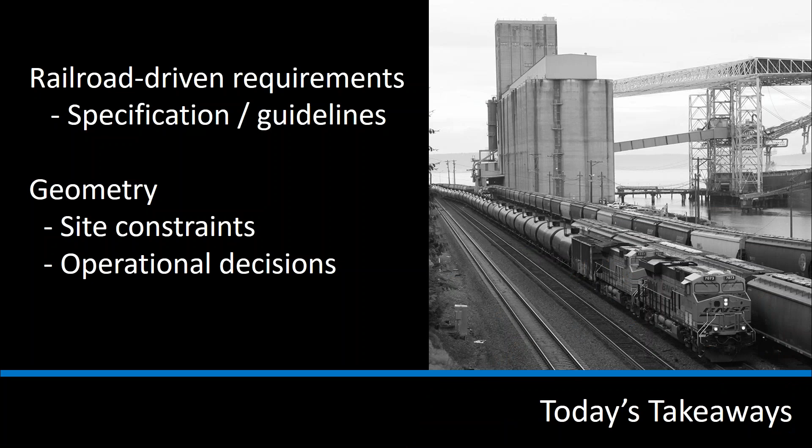We'll talk briefly about the railroad-driven requirements. Railroads put out publications that talk about what they expect to see. And then we'll get into the geometry and how that affects site constraints and relates to your operational decisions. All of the Class 1 railroads and a number of the smaller railroads publish specifications and guidelines. They cover a broad range of things typically, including the submittal process and other things related to how they expect to see the design. And among those things, they talk about geometry and some of the things related to that. We're going to be focusing in there today.

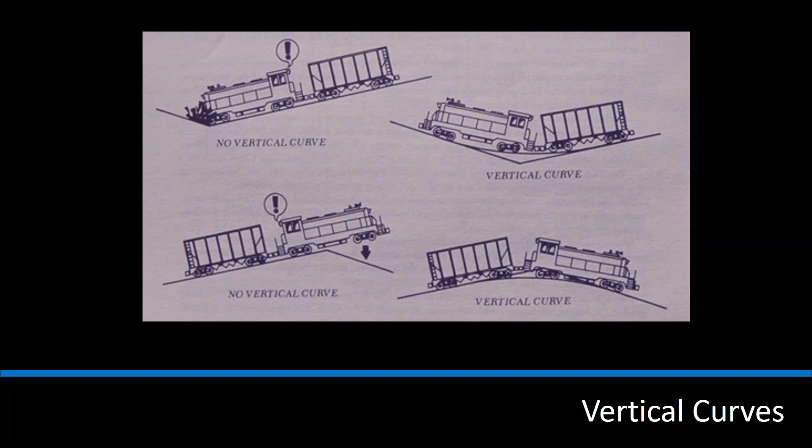They talk about vertical geometry, curves in the vertical and how the grades affect your track, what your minimums and maximums are, and what they expect to see. We'll get into that more in depth, but we'll talk about what kind of room they eat up and why you need to allow for them.

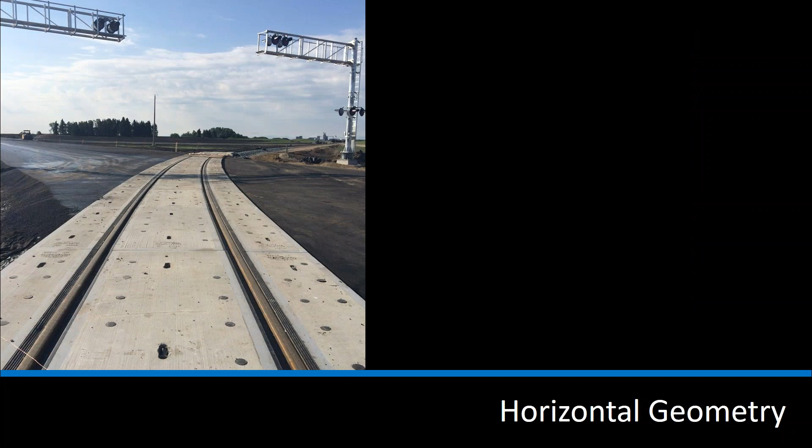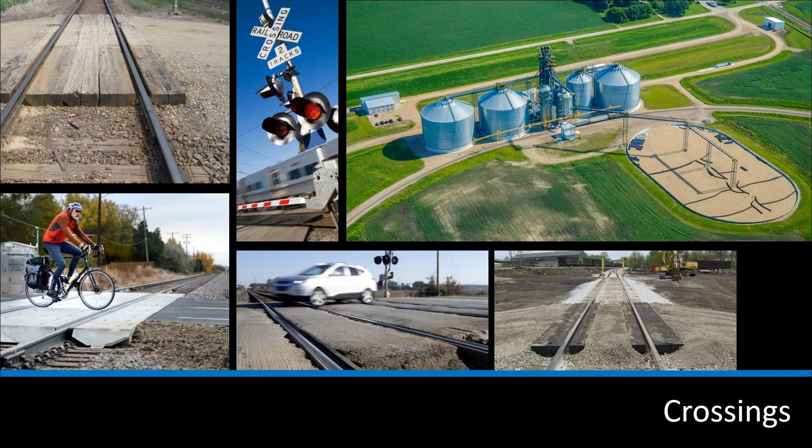We'll talk about horizontal geometry, curvature, and how it relates to other elements of the site, spacing, clearances, that kind of thing. Turnouts and crossovers, how you're going to move from one track to the other, and the kinds of space that those things take up. They have minimum size requirements, that kind of thing. A number of things related to crossings, grade crossings for pedestrians and vehicles, utility crossings, and structures crossing the track.

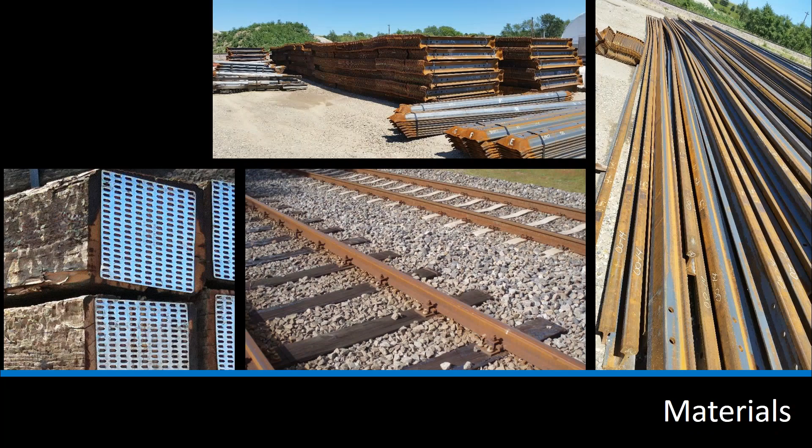They have a lot to say about acceptable materials. We'll get a little bit into that as well. And they talk about construction requirements. We won't spend a lot of time on construction requirements per se. There's really not a lot to talk about. The cost implications are fairly straightforward. They're not out of line.

You'll be building track per their construction standards, and I would expect any contractor to be familiar with that, so not really a point to dwell on, although I would like to point out that they have requirements for flagging. If you're doing work within a certain distance of the main line, and that may vary some depending on location and railroad, they will require a flagger, a railroad person, to protect not only the construction workers, but railroad personnel. So we won't spend a lot of time on the construction side, but that is a concern.

And then they'll have other safety-driven concerns that they're going to deal with in their specifications. The railroads are concerned about all of these requirements. As a general rule, they have very little incentive to deviate from them. The requirements will vary from railroad to railroad. They're in place because of how the railroad operates, they're in place because of fundamental engineering principles, and they're in place for safety.

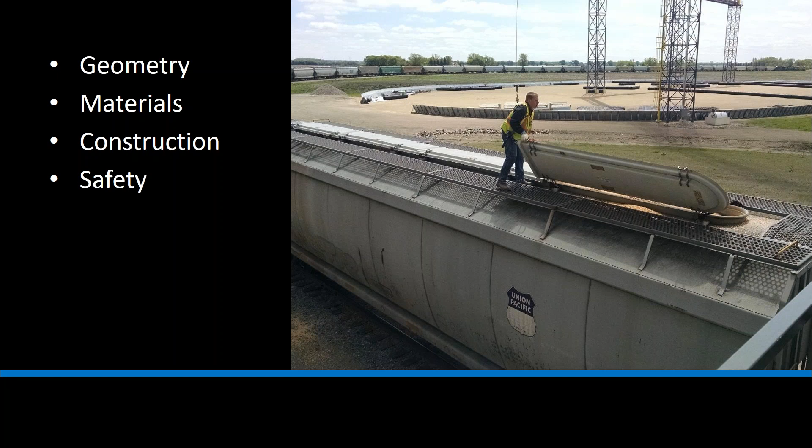When we're starting work on the railroad, whether you have an existing facility or it's brand new, they'll expect you to follow the latest specification. There are a number of reasons for this. Modern locomotives and rail cars are larger than the old ones. They're going to take up more room. And while you have existing assets that might get grandfathered in, anything new will probably need to fall into these requirements.

It's probably worth noting that rail car size has changed too. And while your facility operates today with cars of a certain size, they can't guarantee that there won't be larger cars. So that may come in as a consideration as well. Everything's heavier than it used to be. That also factors in. And safety is probably seen differently. Safety is of paramount concern to the railroads these days, and a lot of what they're doing is going to relate to safety.

Quick note before we jump into the geometry though. While the railroad is reluctant to bend or give on a number of these requirements, there may be some room to move on some of them as needed. And typically, cost isn't going to be one of them. It's probably not a winning argument. But assuming they want your business, there may be room for allowances. My best advice is to either ask the railroad what's likely to have some give, or ask an experienced designer what's going to have some give.

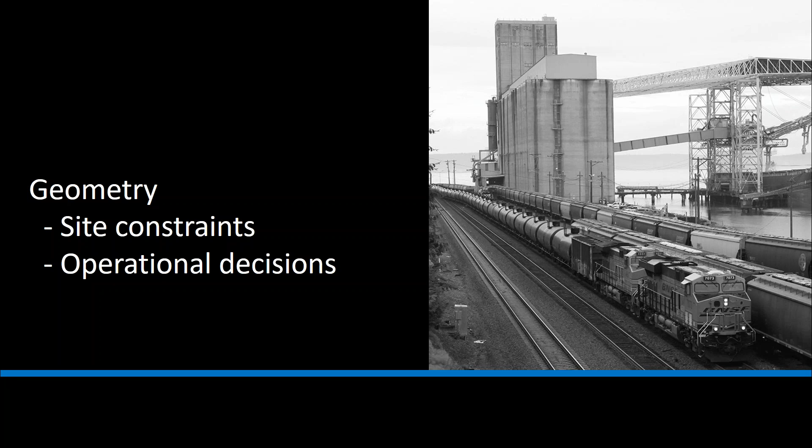A number of railroads incentivize larger trains. A lot of what I'm talking about today is assuming that you're upgrading your size or you're building for the large train from the get-go. A lot of the examples are assuming 100, 120, 134 cars, although the same things apply to smaller car movements.

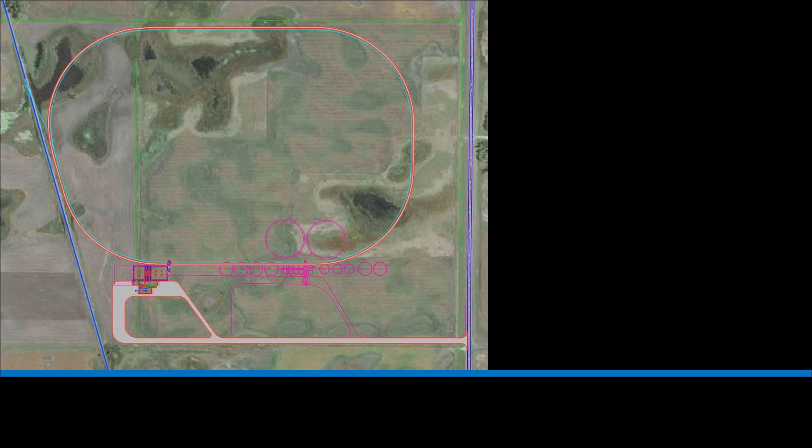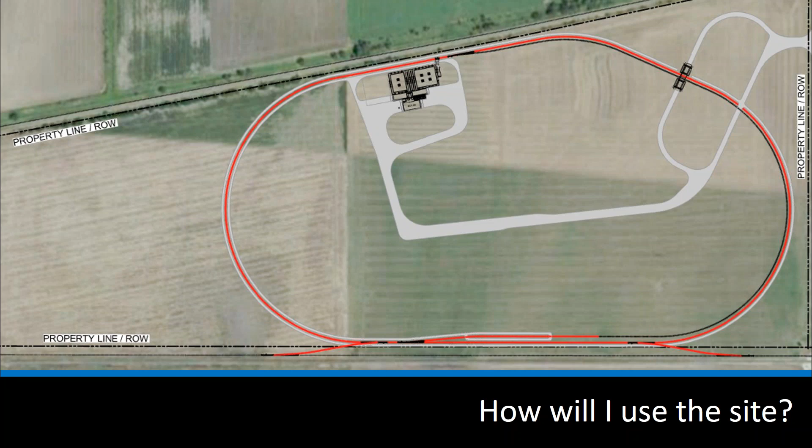As a bit of a pet of mine, a bridge can really take advantage of all of that inside space. You're buying all that land anyway, you might as well put it to work for you, especially if you have the room or the grade change to accommodate a bridge. It surprisingly doesn't take that much to get that in there, and we can take advantage of all that space in the middle of the loop.

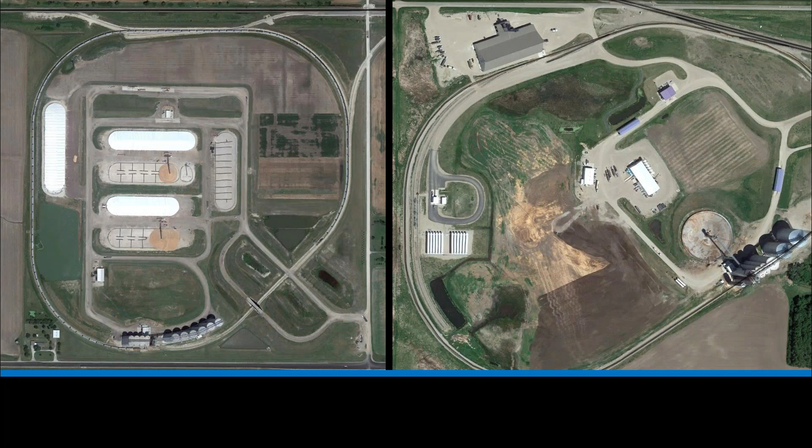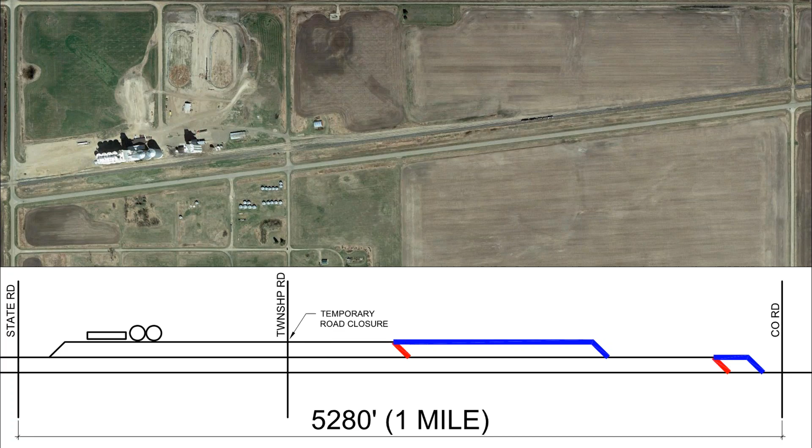The next thing we're going to look at here is what we're operating in there. This will relate to some of the geometry and power requirements, but what do I have? Am I dealing with singles, manifest traffic? And it could be one commodity or it could be multiple commodities, but we're talking about anything that the railroad breaks off when they come to your site. They're going to leave a handful of cars and then move on.

That'll affect how we're going to handle it, especially if you have 4 different commodities. If you're receiving 25 cars and 4 commodities, we're going to need a lot more room to sort and maneuver that train around.

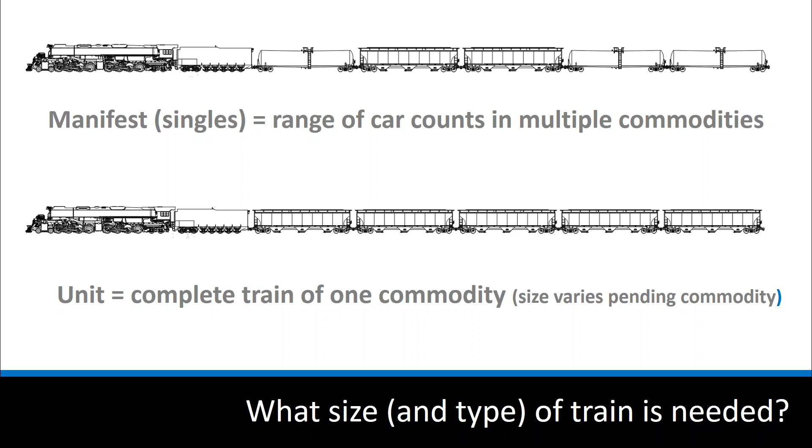If we're handling a unit train, it's very different. If we have a complete train with 1 commodity on a loop, it's probably pretty straightforward. If we're dropping it, as in the previous example, on a siding, we still need some track for maneuvering, but if we have the other things in place, it'll probably be fairly easy to handle. So some of those things we're going to need to look at once we know the train size is power requirements.

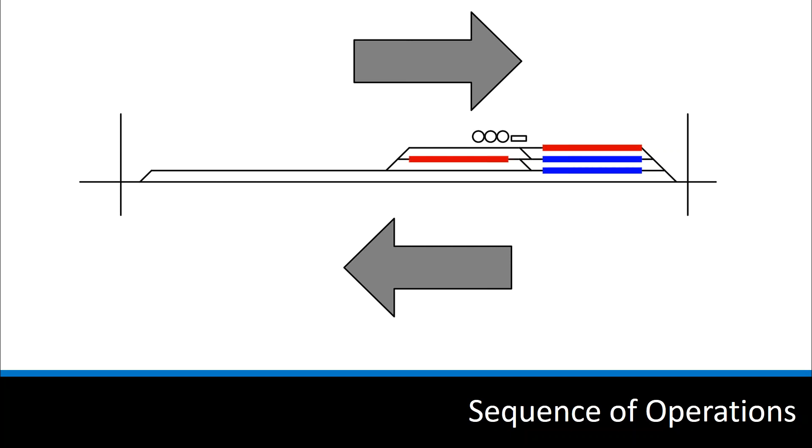Again, I'll jump back to that loop track. Probably not a lot to talk about. You're just going to go in a circle. You're either unloading or you're loading, and when you're done, you're done. If you're mixing in other commodities, then we start to talk about how we're going to shuffle the train around. If we're adding additional track to that loop, or we have a siding here like we're looking at in this image, we've got to talk about how we're going to shuffle those back and forth, and the kind of power will affect how many cars we can move at a time, or whether we have the flexibility to get on and off the track.

And I'm just going to run through an example here of a sequence of operations. You can see there's subtle changes in the way the cars move back and forth, and this is just a schematic. It's a very easy way to break down the track lengths and segments into something that's easy to understand for car movements.

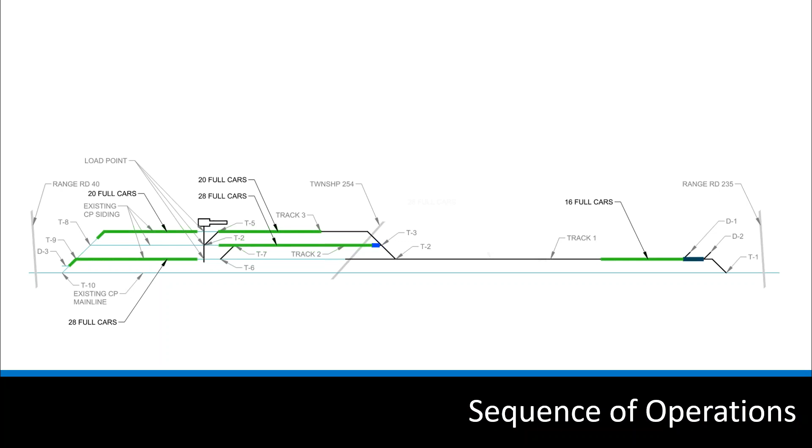In a lot of cases, the railroad will expect to see something like this as part of their submittal process. It might outright be a set of drawings like this, or it could just be a written description of how you're going to operate. We tend to find that the pictures work better. They also work better for the facility owner as they're trying to figure out how their people are going to operate the track. A fully loaded train there.

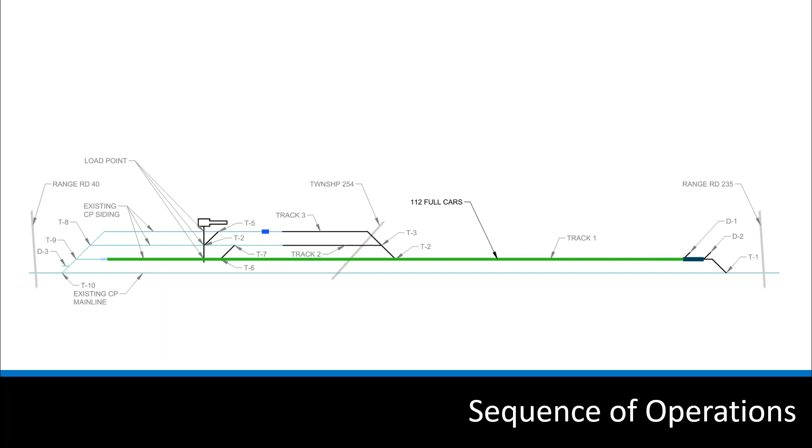So let's get into some of the elements of geometry here. As mentioned earlier, the railroad will have specifications that relate to these, and the reasons are for safety, operational considerations, and just sound engineering. What you're seeing here is a plan and profile. It's really distorted in the vertical because track is generally pretty flat anyway, and it's hard to see what's going on. But we need to be careful about how we grade out the track within the facility so that it's easier on the power requirements and so that cars don't roll away.

I really don't want to park a car and have it move on me. And in fact, the only slope you're seeing on here that a car wouldn't roll away on you is that 0.22. Anything over 0.3, we're starting to worry about where the cars are going to roll and move. Now that 1.5% you see, probably acceptable in certain areas of your track, but that's only so that you can get in and out of the facility. You're probably not operating on that.

The curves, they eat up some room. Here we're showing curves 100 feet long. We're going from a 0.22% to a 0.5%. We have to allow room for that.

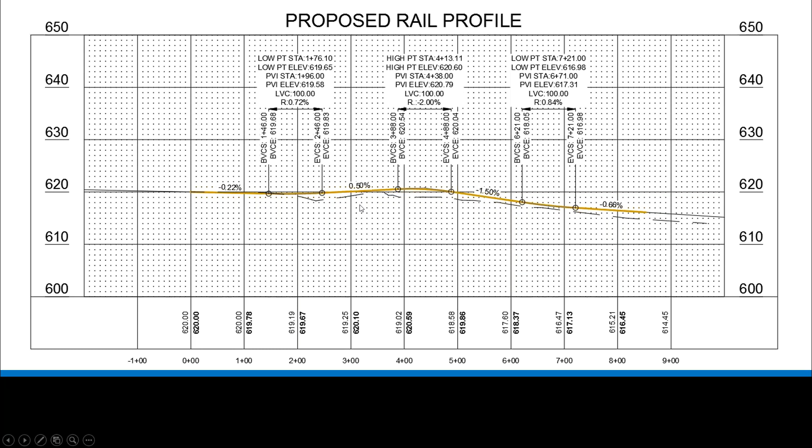Horizontal geometry, curvature, spacing, and clearance requirements. The railroad operates bigger and bigger locomotives. If you're receiving a large train, you're going to need to follow those curve guidelines on the top side of this drawing. That 7.5 degree, that 764.49 foot radius curve, or the 9.5.

And it depends on the size of that unit and the railroad requirements, but they're going to eat up a lot of room. We're talking about a football field's worth of room here just to get some of those curves in there. It's not small. If you're operating shorter chunks of train, you can get away with the smaller curvature.

The 10-degree curve is about as tight as we'll see something deliberately designed. The 16-degree curve is quite a bit smaller than the others, and the only way you're probably dealing with that is if you're already, for example, in a port facility with no room and you're operating through that curve.

But if you are operating through one of those curves, you probably know that it's not a good idea. And we're going to really have to beef that track up if we're making improvements to the rest of the facility and you're still going to operate through that curve. So generally expect that in the design, you're going to have those larger curves, and the bigger the train, the bigger the curvature and the more room that they're going to eat up.

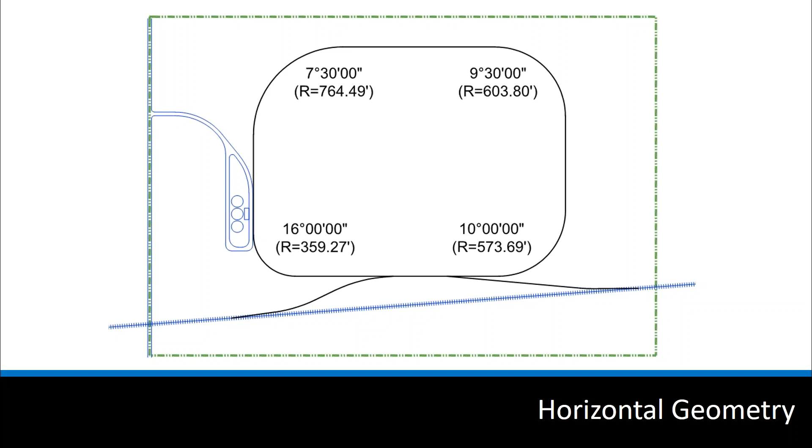We also deal with reverse curves. What the image here shows is an S-curve of the track and a string of train cars. I'm showing the string of train cars as straight through there. Obviously, you want to keep those cars on the track. But as you pull a large number of cars through a curve like this, they're going to want to straighten out, just like I'm showing.

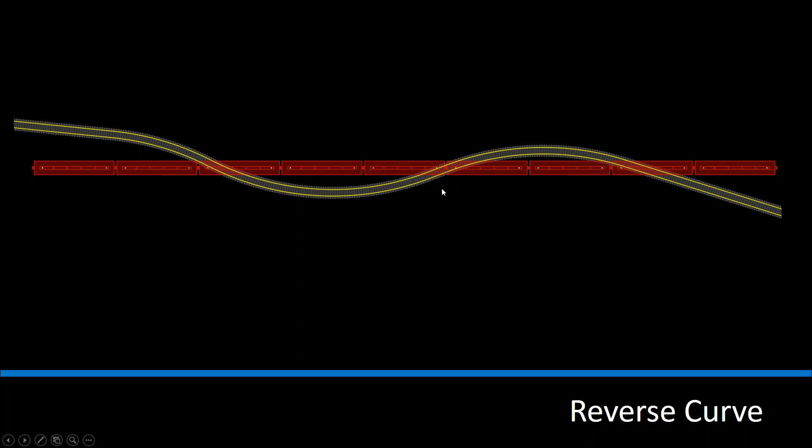The railroad and good engineering design will call for a straight piece of track, a tangent piece of track here where these two curves come together. This takes strain off of the train and off of the track structure. And both of those things are expensive. So they're going to eat up room, but they're a necessary part of how this track design comes together.

And they also might have requirements for future expansion. Who knows? They might want to put in a double track there. They need you to stay away for that. So expecting to get close to the railroad is probably a non-starter in most cases. As far as your track, though, in the industry track, speed's probably not really a factor, but safety is a factor, and potentially room to grow.

Track separations are there so that vehicles and people can operate between the trains without issues. We can't just put these things one right on top of the other. That's not going to work. And on that same note, clearance requirements, they're fairly exacting, fairly rigid. These are actually set by the state, although the railroad will have a set of requirements. Push comes to shove, state or province will govern.

Two examples here, we're showing clearance envelopes. The clearance envelope isn't strictly speaking for your locomotive or your rail car. Your rail car, we all know, is not 18 feet wide, but the opening would need to be, in this example, 18 feet wide.

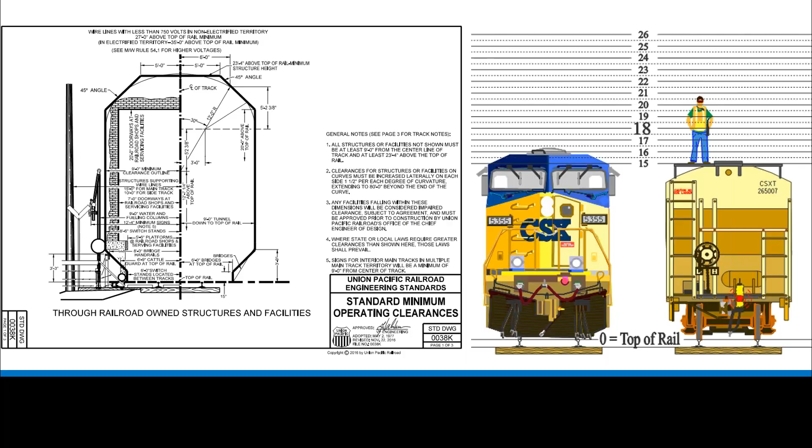Turnouts and crossovers. A turnout is simply the structure that allows you to move from one track into another track. A crossover is a pair of turnouts that allow you to move from one track to a parallel track. Turnouts are denoted by a number: number 11, number 9, number 8. That number is the expression of the angle as a ratio.

A quick little side here: if you have existing turnouts and you don't have a label on the turnout, at the very least, we can measure the frog and figure out what the size of the frog is. It's no guarantee that your whole turnout matches the frog, but generally speaking, if you know the number on your frog, you have the same number for your turnout.

And so I'll just quickly show you here. You find the frog here where the two rails cross. It's going to look something like this. You measure across this point. Doesn't really matter. Pick a spot that's, say, 2 inches across, and you measure at the 2 inches. Then you have to measure a place where you've increased by 1 inch. Actually, in this example, let's go with 1 inch here and 2 inches here.

The distance between those two measurements, where it measures 1 inch and where it measures 2 inches, is the number of your turnout. That's more or less how you come up with that expression. It's not a perfect measurement, but number 8, number 9, 7.5 if you've got an older facility.

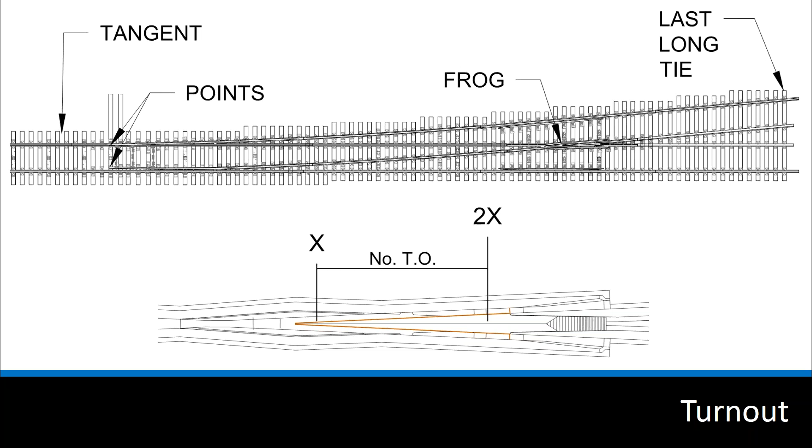Also, I talked about vertical curves. The track needs to be generally flat, but when we're going from one slope to another, a change in slope, we have vertical geometry. None of that can happen within the turnout. Showing a turnout in a flat plane here. I can tip that plane one side to another, or I can have that plane raised on one end, but it all has to be flat. I have to leave room for that entire thing.

So in the example of the 124 foot number 11 turnout with the tangent piece on the end, I've got to allow for that whole space to be flat. And then I've got to work in the vertical curves for grade change beyond that. Just need to consider that as we're allowing room for all of these things.

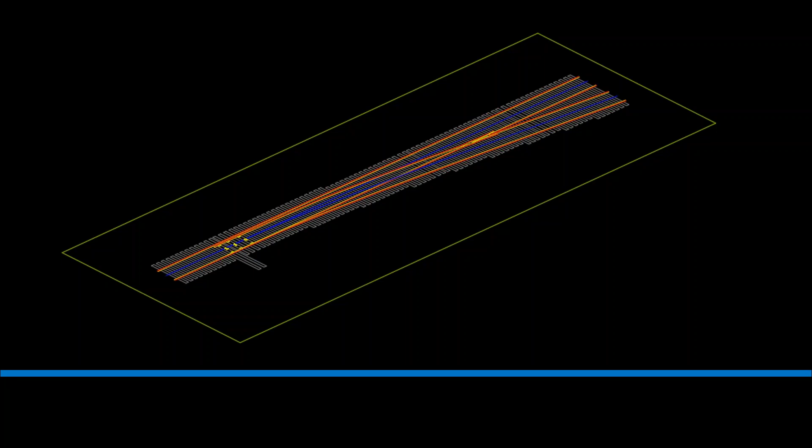Public crossings are dictated by the owner of the road, not the railroad. Typically the DOT will be involved, and they'll have something to say about the type of material used and whether it needs to be signaled, crossbucks, stop sign, so forth. That will not be something we're dealing with the railroad on, although the railroad will be quick to follow whatever the road owner dictates, and they will be responsible for anything related to the actual signals at a public crossing anyway.

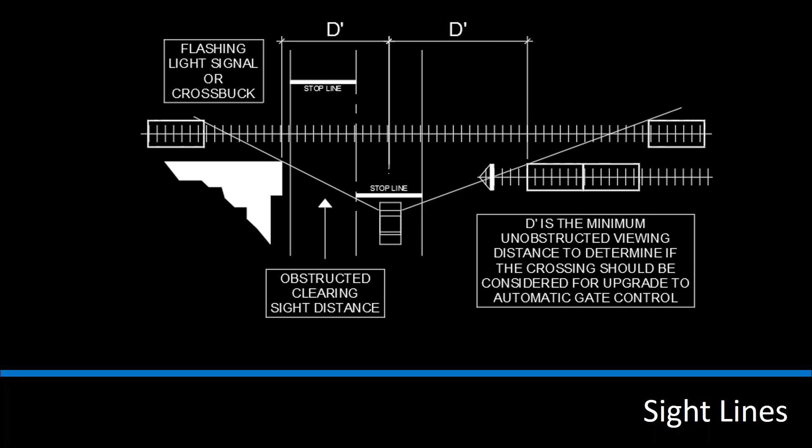Utilities. We could spend a whole presentation on utilities. Many railroads have an entire specification devoted just to utility crossings. It can be a little contentious with the railroad sometimes. Their relationships aren't necessarily always rosy with the gas company or the electric company or the fiber optic company. And so if you're dealing with public utilities or private utilities, there will be a lot of requirements that relate to this. I'm not going to dive into that. Just be aware that that can take time and that those guidelines will have to be followed.

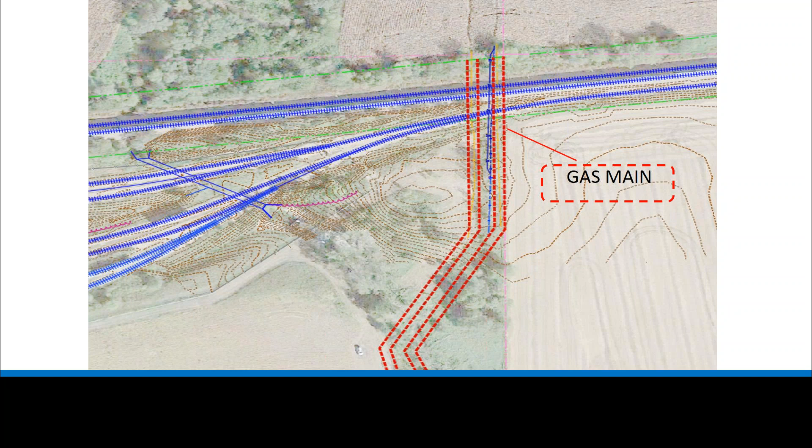A note though, when you're crossing a main line, there's going to be more related to those clearance requirements. This is an industry track and it's their own track, and the railroad still cares. They want this thing to be safe, especially if their assets are moving through there. But if your facility spans across a main line, you're going to have a whole other set of considerations to look at, and the structures will have to meet certain strength requirements. They're going to have to probably be further away. If you have any towers or other structures that are supporting the crossing, they will either have to be reinforced or kept very far away from the track. So some things to consider with structures as well. Not just a building, but any structure related to the track.

Let's get into materials a little bit here. The railroad will have something to say about all of these things. Rail size. They'll have minimum requirements. They'll have minimum expectations about relay rail or used rail. And they'll have minimum size requirements. And this again relates to heavier locomotives, heavier train cars. It does not relate to your maintenance, however.

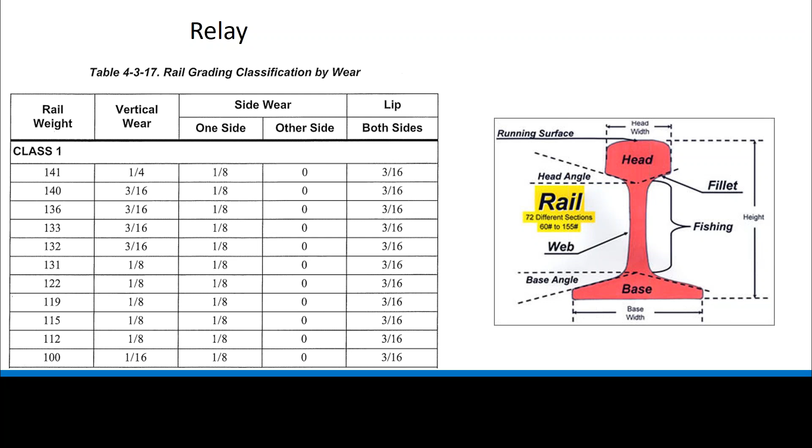Again, they're minimum requirements. And in fact, in some cases, you can get exceptions for even lower than the minimum. It's really down to you and maintenance. Again, the railroad probably doesn't care about your maintenance. They really care about how it looks right now and whether or not they're going to put their assets in your track. If at some point your track degrades, they might cease to serve you until you get it fixed.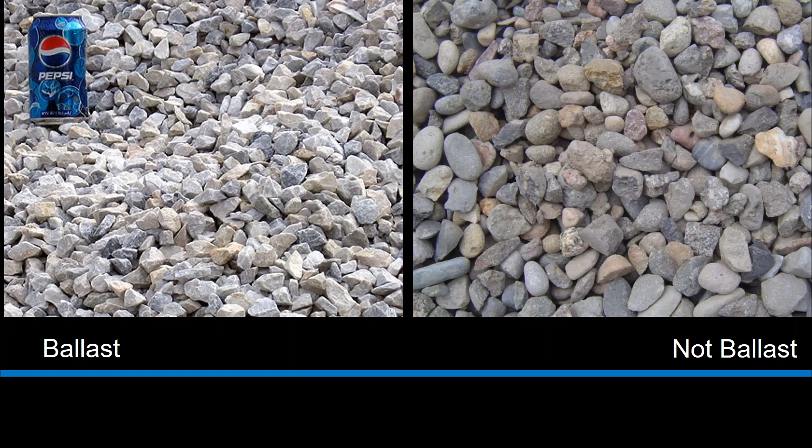So again, considering the maintenance required with it and some of the installation, some of the other factors that come in with these materials, the steel ties, for example, might save you on ballast, but will require closer observation when it comes to install. So just a few things to look at there. They'll certainly care about ballast. And as we get deeper into this road section, I guess I care more about it too.

Ballast is going to be very difficult to change out if you get it wrong. It's probably one of the single most expensive elements of the track structure. Probably spending a lot of money on facility upgrades anyway. The single thing that could break the bank here would be the ballast. But I would encourage you not to skimp here.

Good ballast will be angular. It'll be made out of a hard material, and it'll be sized such that it doesn't trap a lot of fine material. The round stuff on the right-hand side is landscape rock. If you see that on your site, that is not ballast. Don't accept that. It might be a lot cheaper, but it's cheaper for a reason.

A railroad will have minimums regarding size. You might want to consider upsizing the ballast. It'll serve you better if you do. And again, the deeper into the section, the tougher it is to change these things out.

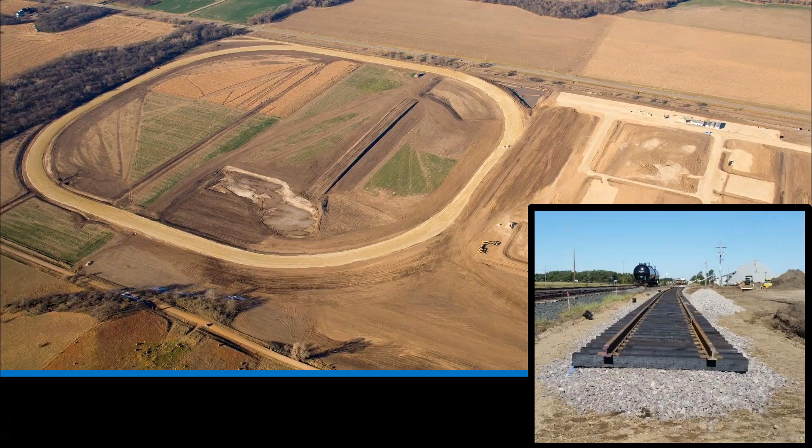The railroad specifications do get into drainage and site prep a little bit, but not as much as one would think, or as a designer coming from the design side, not as much as they probably ought to. The single biggest factor in the quality of your rail over time is how well this subgrade is prepped, drained, and set up to hold the rail structure.

You're seeing earthwork happening for a loop track here with subballast on top. The subballast is the material, as it might suggest, right under the ballast. Think of that when you're planning for your track as a quality gravel road material. It's typically not going to be as thick as an actual gravel road might be.

The track structure does a pretty good job of spreading the load out, so it doesn't have to stand up to truck traffic per se, but it does need to be firm. It needs to shed water, needs to set up nice. It'll have enough fines to bind together. It'll have enough angular material to lock together.

The picture in the lower right there, pretty good take at everything we just talked about. They got the subballast at the bottom, a good quality ballast above that, ties within spec above that, and a good quality rail on top of that to boot.

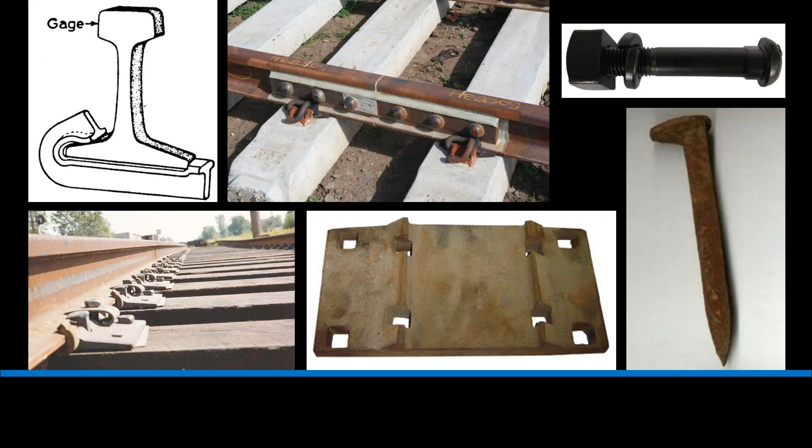There'll be some specifications for some other things as well: rail anchors, joint bars, bolts, spikes, tie plates, so forth. These are typically not deal breakers. I would expect that your track contractor would follow the specification and do at least the minimum in getting the right materials in there, but it's typically not going to be a major cost item. I'm not going to spend a lot of time on it here.

They're placed there so that when you're operating the train, cars don't roll out onto the main line, foul up the main line, cause a collision, or tip over and land on railroad property. They're made to direct rolling cars away from the railroad and onto your property.